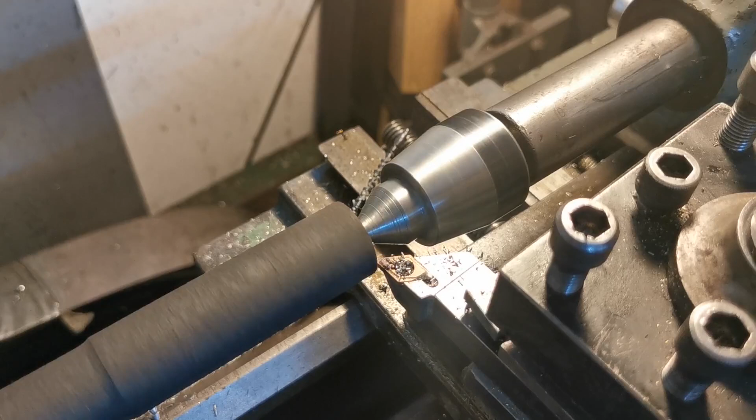What's going on, guys? So this was meant to be in the last video, but those engine mounts ended up taking a real long time to sort out.

So this time we are going to be looking at the absolute headache, the bane of my life that has been drive shafts, which means only one thing: CV boots, CV grease, which is just the worst stuff ever created. It gets everywhere and is sticky. This is my least favourite bit so far.

We're going to pull apart all of the CVs. I'm going to run through what I've tried to this point, because I've been battling this for a little while, and then we're going to look at how we're planning to solve this now and how we might solve it longer term if this doesn't work or fails at some point. So I think without further ado, it's all down here, so I'll get it laid out and we'll have a better look.

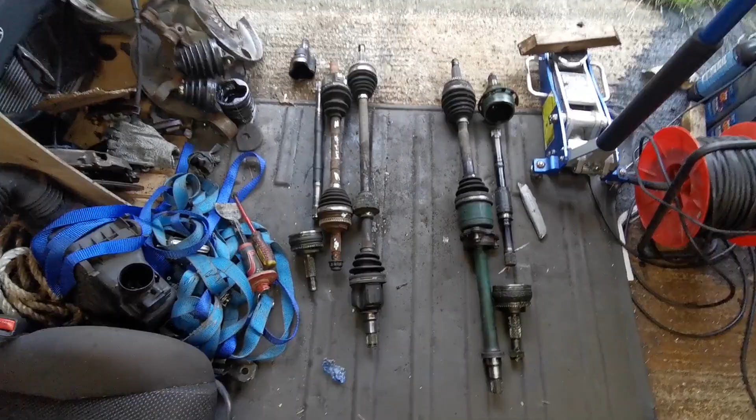This is the current collection. There's a few other bits that maybe we'll have a look at, but this is all we really need to know. On this side of the room we have Celica shafts. This one is for the right hand side and it's a two-piece shaft, and this one, which has been fully disassembled now, is for the left hand side, and it's just a single piece shaft. On this side of the room, in this corner, this fighter, we have the Yaris shafts.

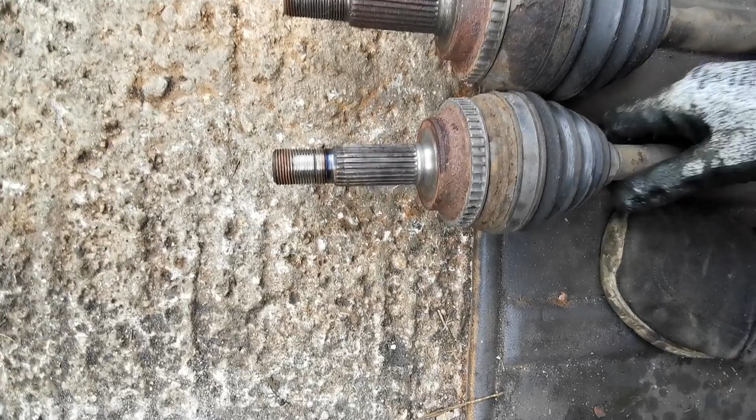A little rundown of what the actual issue is. The best way to look at this is like this. As you can now see, that end of the shaft is about lined up, about the same length. This end is a different length. This shaft is longer, not by a huge amount, but just enough to be, I think, well, I know it wouldn't work. So you'd have to lop off a bit. It's too long. That is issue numero uno.

Just as a side note, if we actually look at the other side though, the shafts are actually, this one's shorter. The next issue we have, and we'll look at it on this shaft because it's easy.

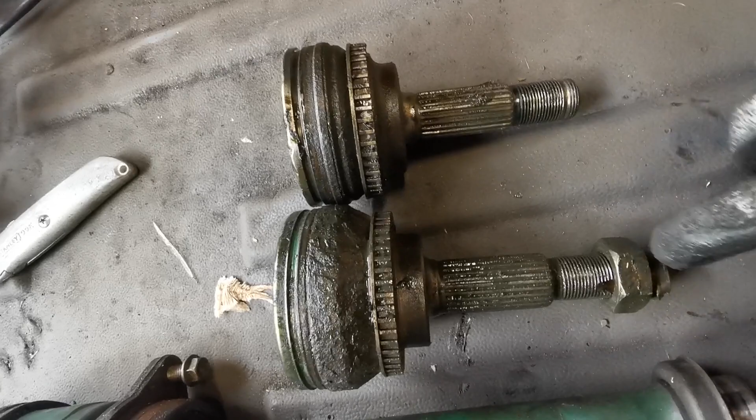That probably doesn't show up too well, but that spline and that spline are not the same. And at this end, that spline and that spline are not the same. That is further compounded by the fact that this is a Yaris CV and this is a Celica CV. And again, I don't think it shows up fantastically, but that spline is different to that spline, and vice versa. This is the inner CV. We have covered this previously, but that spline is not the same as that spline on the gearbox side of the Yaris.

So basically, none of the splines line up with each other. You can't swap any of the CVs between shafts, so it's not like you could run the Yaris shaft with the gearbox end of the Celica shaft. There is no combination of these that you can get to work together.

I scoured the internet for hours, actual hours and hours, trying to find a CV that would spline onto the Yaris drive shaft, to absolutely no avail. I then bought this, which is a later generation Yaris lower arm, because I was told that that fitted.

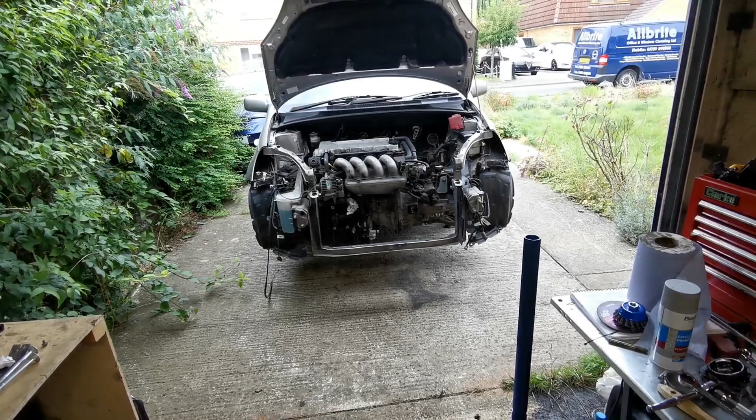And to go with that, buried under these gross CV boots in amongst all this other crap, is a Mark II Yaris hub. Now, the Yaris hub actually takes the Celica CV spline. It doesn't bolt into the suspension strut on the Yaris though, which is not the end of the world. You could modify that to fit, but who knows.

The bigger issue is that that lower arm did not fit that subframe. The idea with the lower arm was it made the track wider, as did the hub, and then you could just run both of the Celica shafts and all would be well.

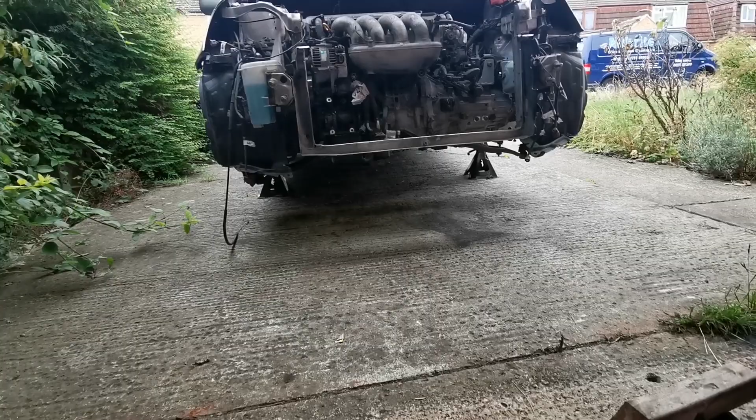I have been told that on the MR2 this shaft is slightly shorter, and as a result you can put an MR2 shaft on here which will mate with the Celica box. You can then run this Celica drive shaft, and if you get some Corolla hubs, I believe, allegedly, they bolt straight in and they retain the 4 stud pattern, whereas the Celica hubs are 5 stud, which is bad. We don't want that. However, that is not the solution that we are currently aiming for.

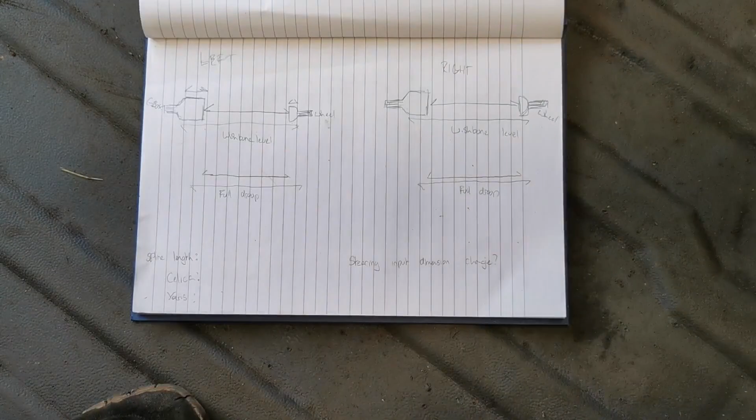What we are currently going to do, I shall get my little sketch pad out and we'll have a little sketcheroo. So bear with 2 seconds while I go and get that, because I'm disorganised, and we'll have a little draw, little sketch, and it'll be fun. Now, here we go, my best artistic skills.

So the plan is, at this end, we are going to have a Yaris hub.

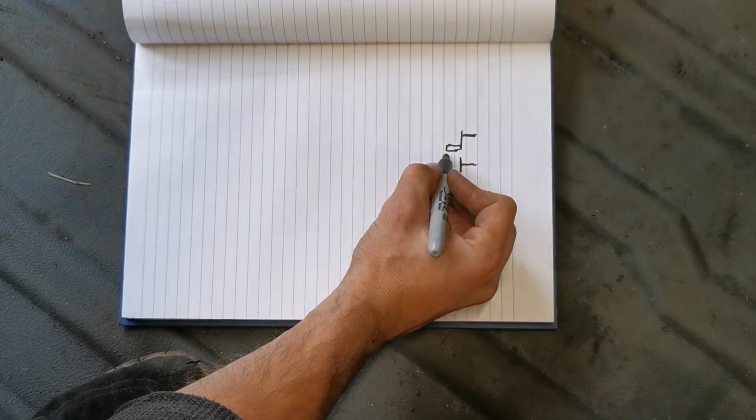This is a terrible drawing. Anyway, this is a Yaris.

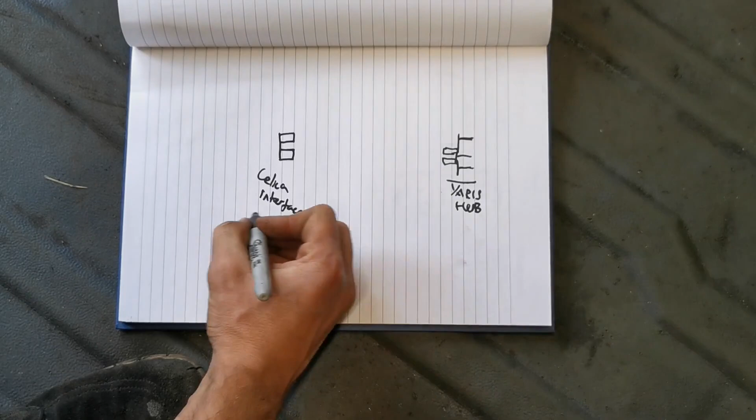Oh my gosh, Yaris hub. There, at this end, depending on which item we're looking at, we're going to have the Celica interface. So that will be either the gearbox or it will be the CV that's on that 2-piece drive shaft that we looked at a minute ago.

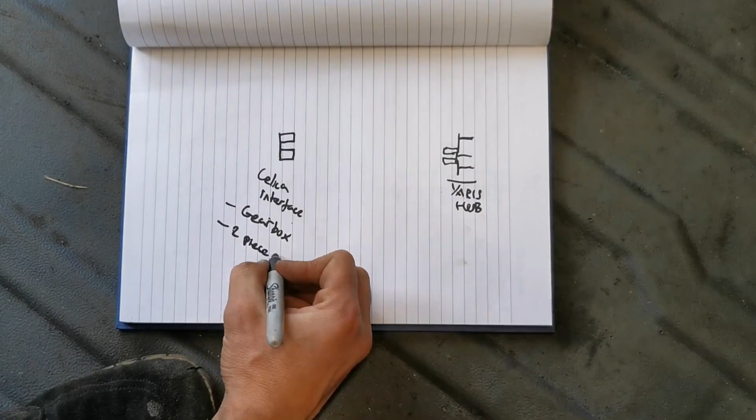I can't spell or write. Now, the issue we have at the moment is that we have a drive shaft which will fit this, and we have a drive shaft that will fit this, but we don't have a drive shaft that will fit both.

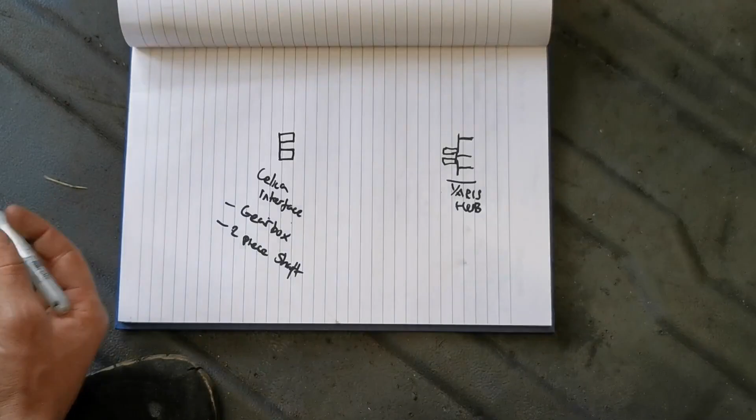So here we have a Celica inner CV, and here we have a Yaris outer CV.

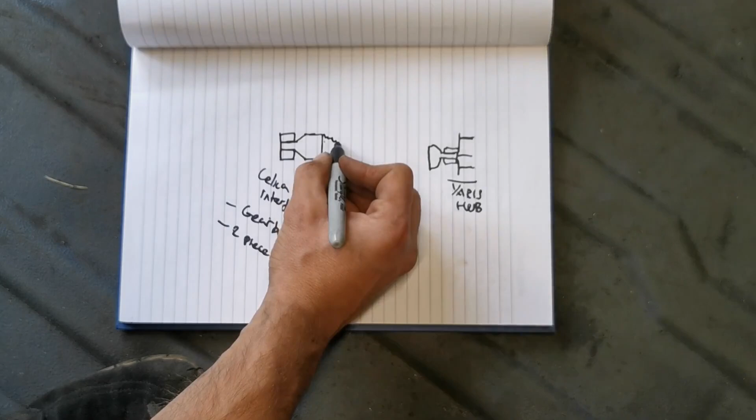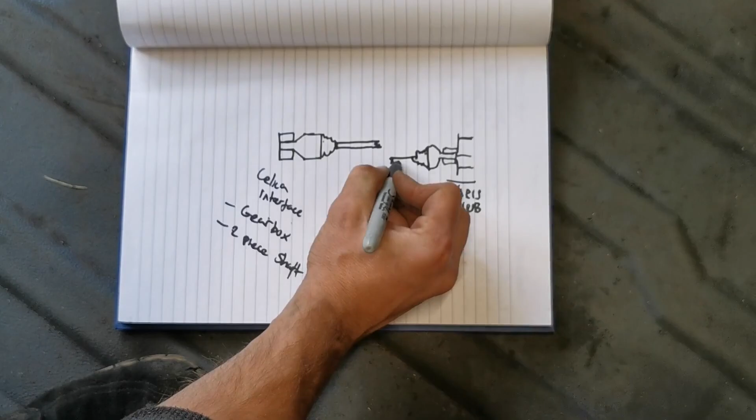What we're going to do is take the drive shaft of the Celica, like so, and cut it there. And guess what? We're going to take the drive shaft from here and cut that like that. So now we have two half drive shafts, which is no use to anyone.

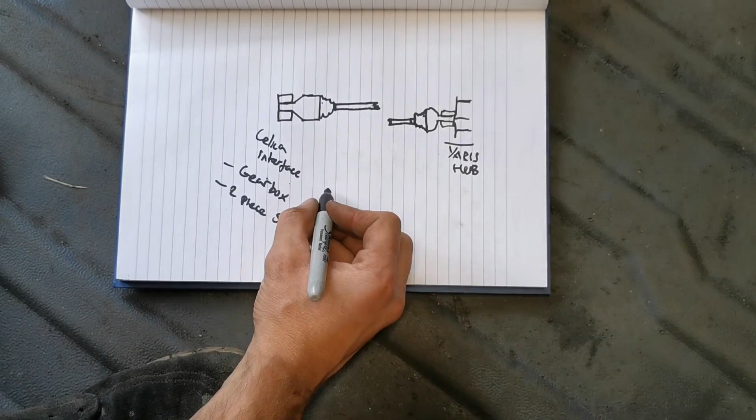But this is where it gets a bit sketchy, kind of. What I'm going to do is on the Celica side, initially—imagine this is zoomed in—I'm going to put it in a lathe and turn onto that shaft a taper of about 45 degrees.

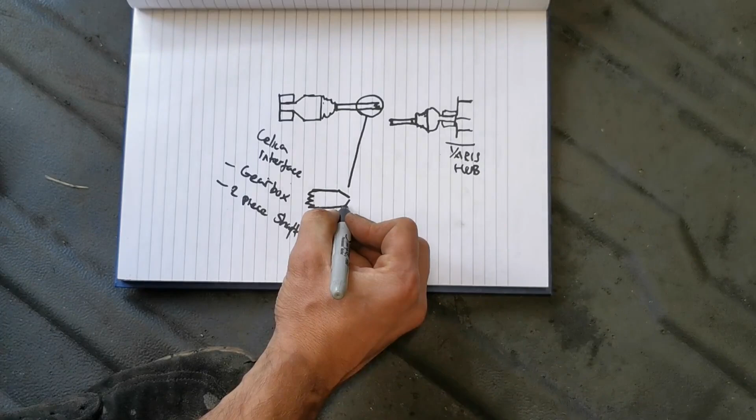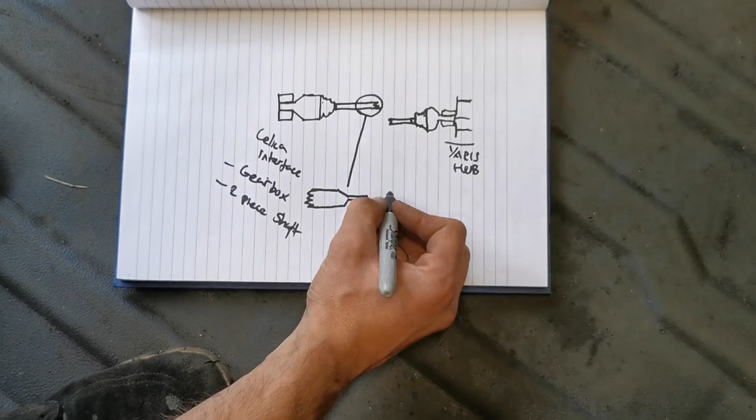At the end of that taper, I'm going to put a little dowel, so it's got a bit of a dowel pin to it. On the Yaris side, we're going to take that shaft—it's actually a slightly smaller diameter—and do that, then put the taper on, same as that one, but on this side we're going to drill into the shaft a hole which is pretty much exactly the size of that dowel, and slot that into there so it holds itself true.

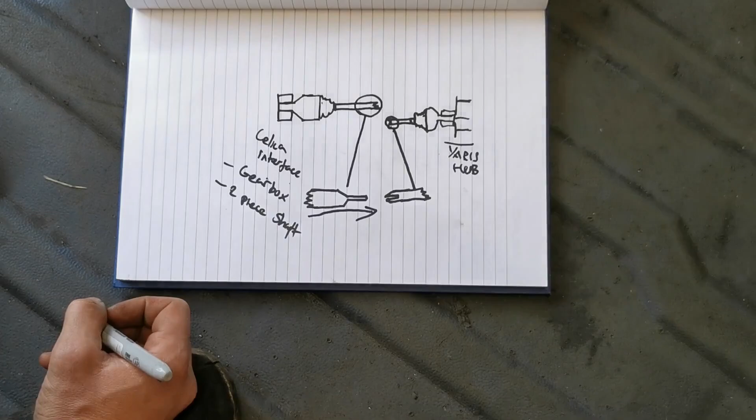I will hold both ends of the shaft in the lathe, hopefully, and then we will weld it together, building up the weld into this V groove as they go together, for a really nice, strong, hopefully, bond. Loads of heat, big TIG welder.

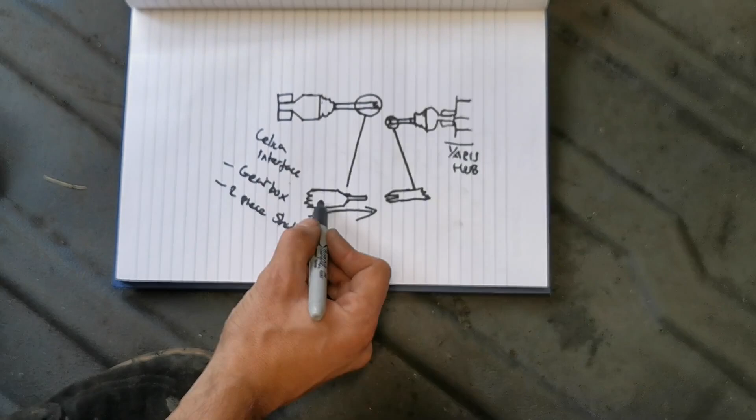Once that is done—like I said, this is slightly bigger than this—we will then run the lathe and it will just skim the top off the weld, and run the lathe just slightly over to that, taking off a bit of that material, so this and this to this point are uniform.

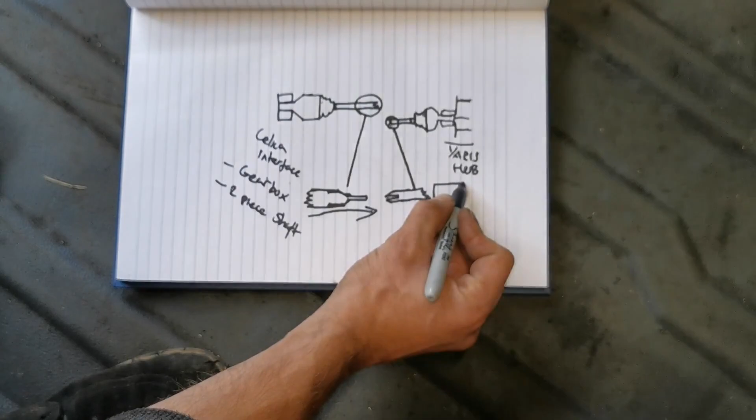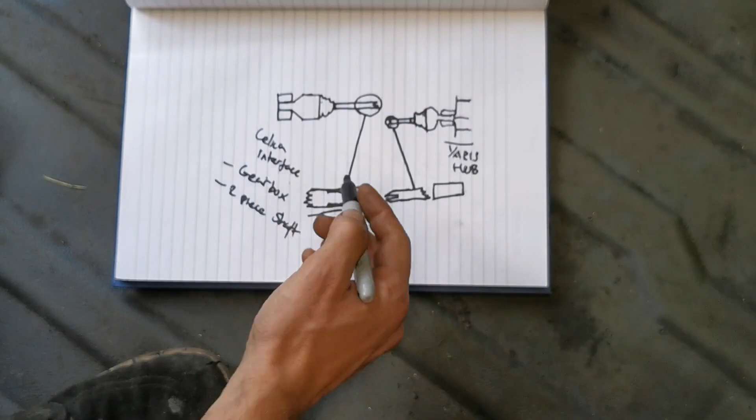Then I'm going to slide over the top of that a sleeve, basically a bit of tube, which will sit all the way over the joint and the weld. I'll run a bead of weld around each end of the sleeve, so if this joint fails—because drive shafts are designed to have some twist in them, and a welded joint isn't ideal for that—hopefully all that will happen is I'll lose drive, and this sleeve held in place should stop a flailing shaft wiping everything out around it, because that would be less than ideal.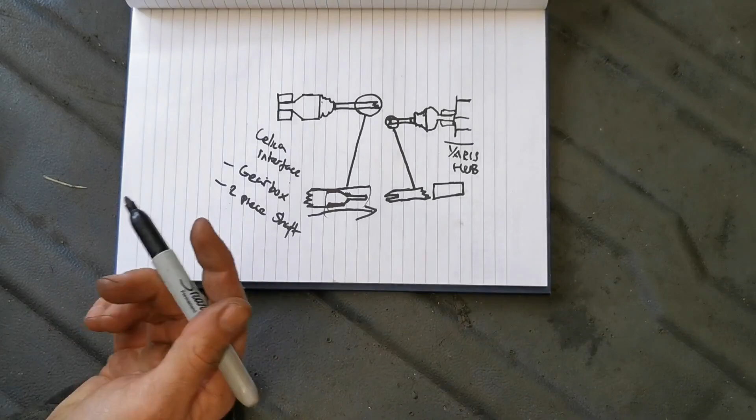So that is the plan. That allows us to set the length, retain the Yaris track width, retain all of the Yaris front end, run a Yaris CV in the Yaris hub, and mate to the Celica box.

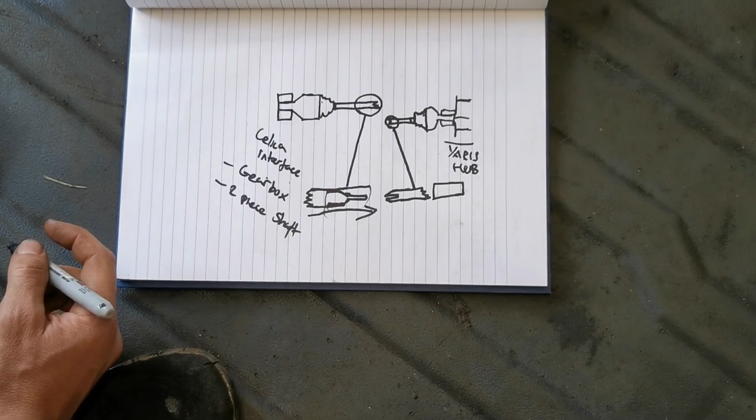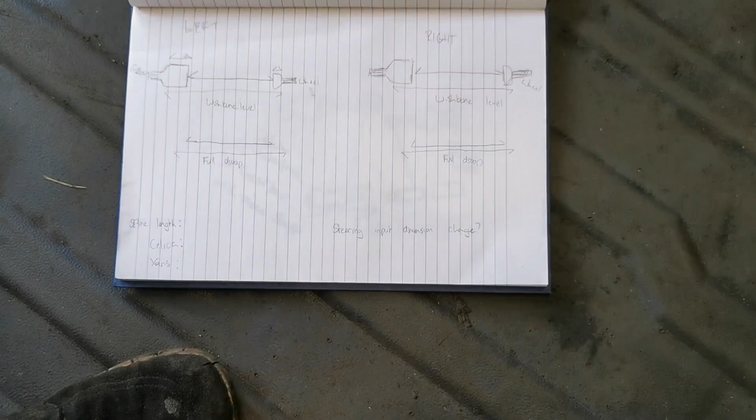So what I'm going to do—I've drawn out a little table here, we'll have a look at it over there in a sec. All I need to do is measure, basically work out the length at full droop on the suspension and when the wishbone is level, which gives me the longest and shortest eventuality of the drive shaft. We'll go through how we're going to work that out in a moment.

If that fails, then we'll have to get some Corolla hubs and some MR2 drive shafts and see if that works. But for now, this is the plan, and that is how we are going to progress this video. So let's get measuring, and then we'll go and get making.

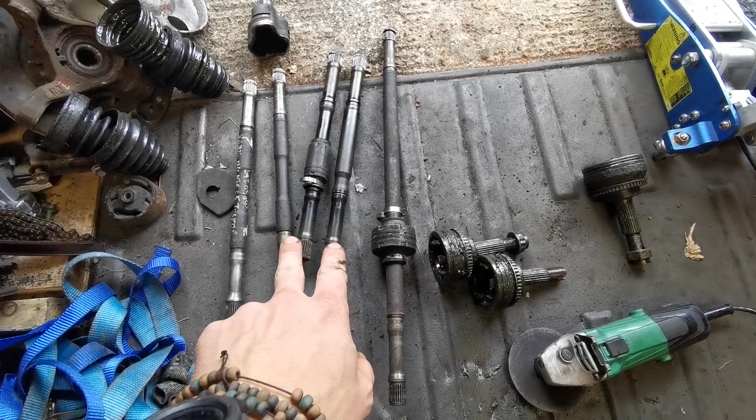And just like that, I have all the bare shafts I need. So the two Celica ones there, the big long Yaris one, and the two Yaris ones, but that's the non-mullered one because it's got all the breakers writing on it.

Now the Yaris CV outers are just a monumental pain in the backside, I find. The Celica ones were dreamy, and the Yaris ones were not, but I did find there's a really useful tool that you can use to get rid of them.

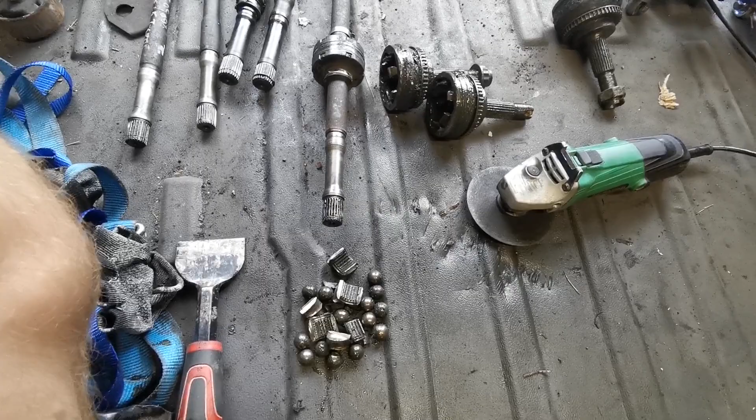So that gets rid of them pretty well. I'm not sure if that's how you're meant to do it. Pretty sure it doesn't say that in the Haynes manual, but online everyone just seems to suggest that you buy whole new drive shafts, but that doesn't work for what we want to do.

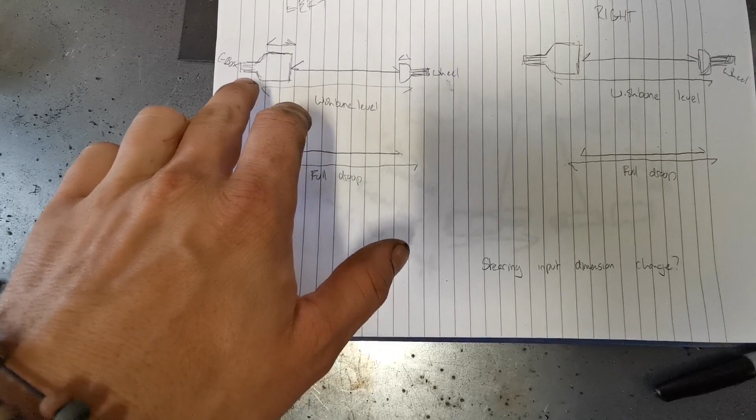If we go back and look at our pretty pictures, I think I mentioned this in the last bit. I've got my left, I've got my right, and it's measured. I'm going to measure the...

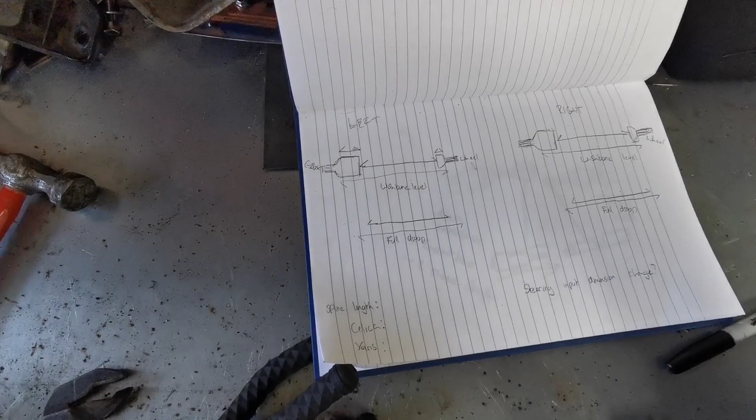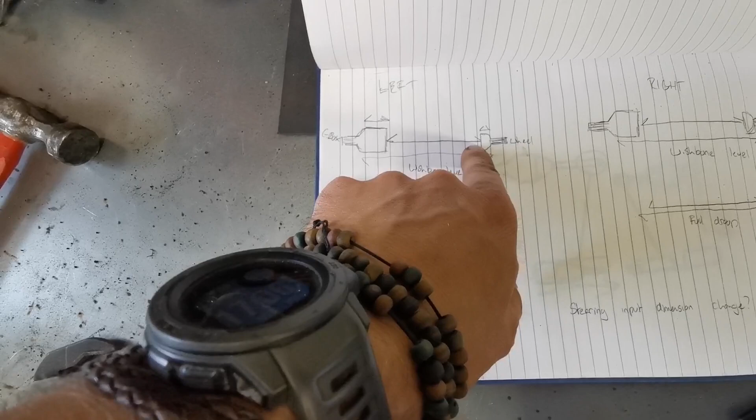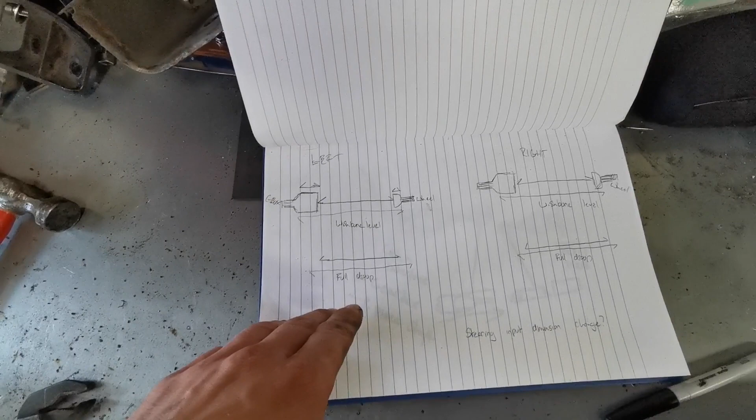Internal depth of both of the CVs, then with the wishbone level jacked, so that should be the shortest the drive shaft's ever going to be when the wishbone's level, and once it goes past level it gets longer, and once it droops past level it gets longer. So I'm going to get the length from there to there, and then from the back of the CV to the back of the CV, and I'm going to do the same thing on full droop for the left and right, and that tells me basically the shaft has to be quite a bit longer than that, but cannot be longer than that, otherwise it will bottom out or it will pop out.

I've also got spline lengths defined here, and yeah, from all of that we should be able to work it out.

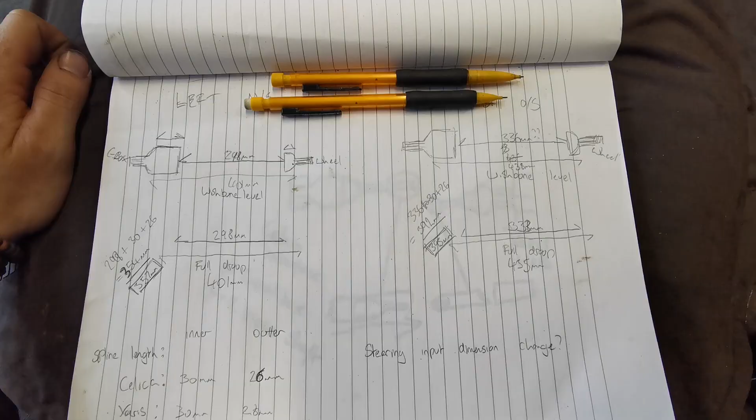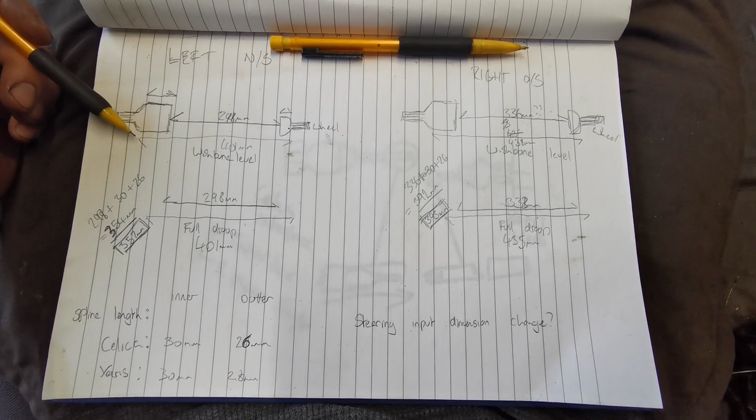Last talky bit before we start the doughy bit. Got the measurements. There's absolutely sod all really in it, like a couple of mil between this and the suspension travel, which is quite nice. I guess there's not masses of travel on it, to be honest.

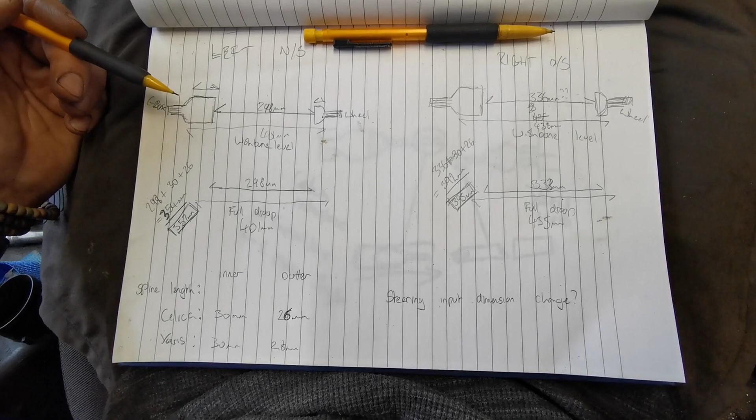There'll probably be even less potentially if I do some suspension mods and get it slammed, but slammed to a good level, not a ridiculously low level.

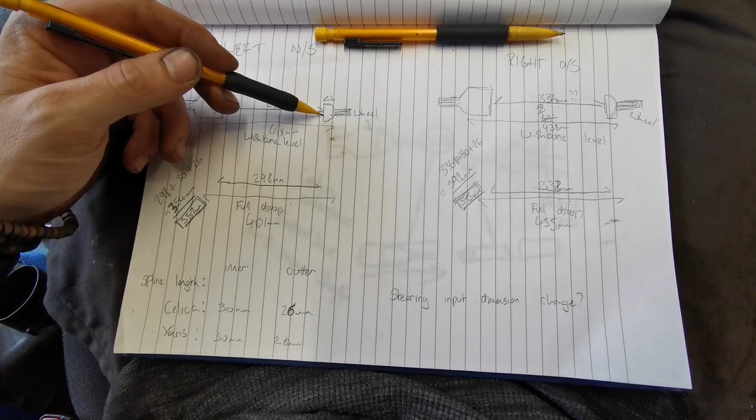But anyway, basically all I've done is taken this length and then I've added the splines on. Once you've got the splines on, this CV is stationary and the splines really do sit flush with the back. So you just add that spline on there, and then I just rounded it up slightly by a couple of mil.

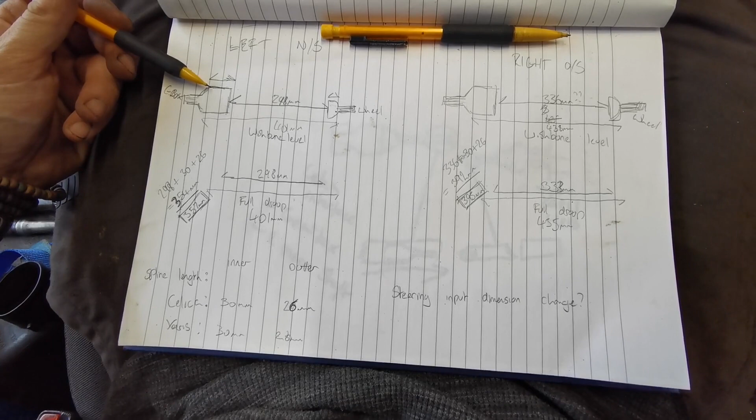I might take that to 360 to be honest, but there's no way it can come out, and it's going to be sat about halfway in there all the time, which is about where it wants to be.

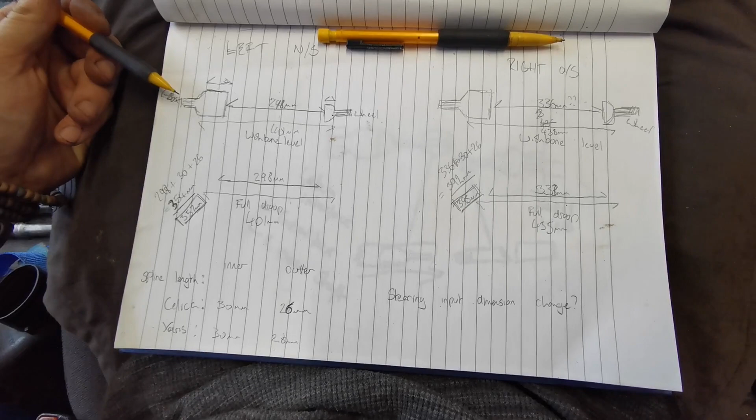So without further ado, we're going to go on a little journey and visit a man with a lathe who's very kindly offered to give me a hand, and have a look at actually making them as described. So let's go.

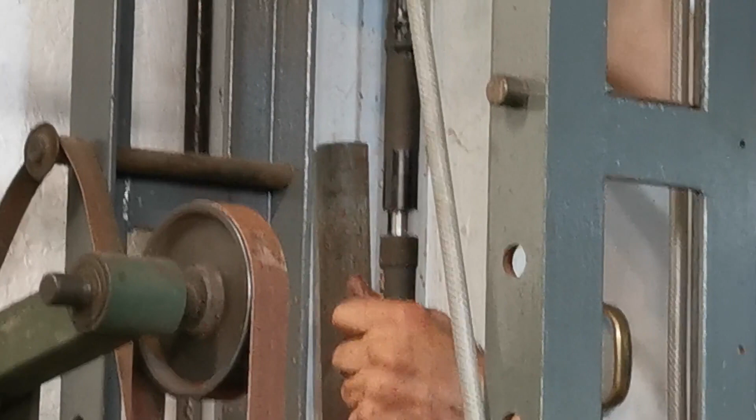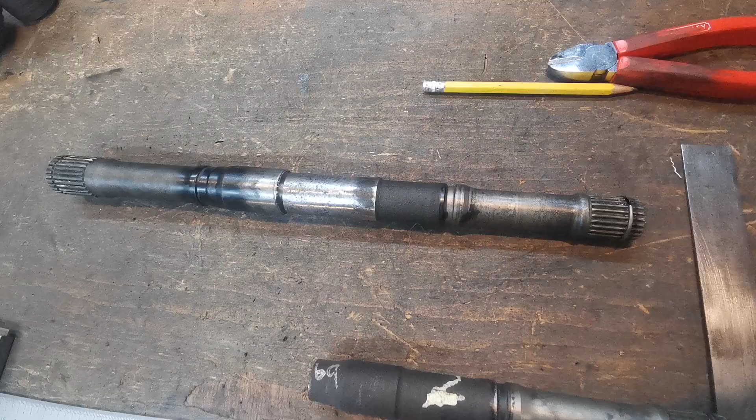First and foremost, huge thanks to Mark for helping me out with this, absolute lifesaver. Obviously I couldn't have done this without him, but looking at this you can see we've got the shaft shoved together now and it's connected, it's pinned and doweled, it's nice and true, we've checked that, all is looking good.

Now we just need to run some beads of weld in the joint there, all done. Everything will be good, hopefully it will stay true. Let's crack on.

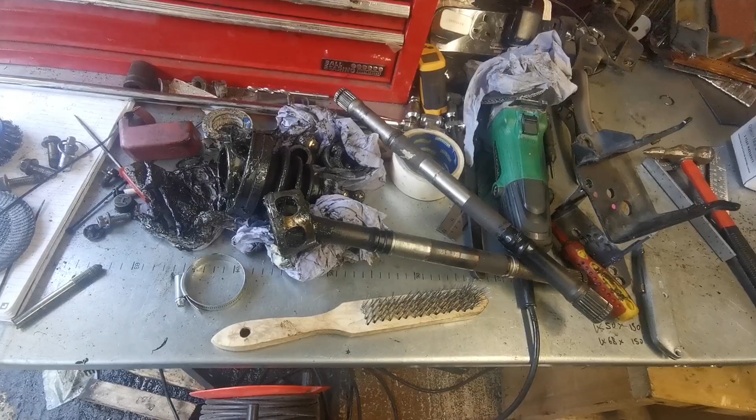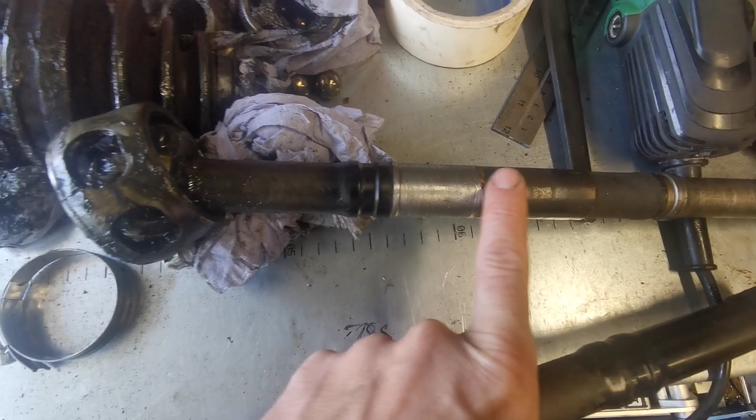So next step is going to be to take these shafts that we've got now, see, nicely welded together, and it actually worked out pretty perfectly with the Yaris and the Celica shafts, that by selecting the right ones, there's a slight step on that, see, where the thicknesses are, but the thicknesses are almost identical, which is nice, and they're welded up, got a good few beads of TIG in there.

And the next step is going to be, I've actually just got to get a sleeve turned, so I'll be sleeving over the joint, and I'll put a bird's mouth on the end of each of the sleeves, because that stops you getting that single plane of heat affected area, so it should make it a nice bit stronger. But I need to get them turned, so we shall have a little look in a later video at just welding them on.

The key thing now though is to check that they fit, because with this one in particular, me being the muppet that I am, I referred to the wrong number when I started cutting them apart, and it was actually, I think, 30 or 40 mil shorter than I'd calculated it needed to be.

Luckily you regained 10 mil, and fingers crossed it's going to be just long enough, as long as it doesn't pop out. Ideally the little circlip that sits inside the inner CV retains and doesn't pop past that at full lock and full droop, we're all good. I've got some shiny new CVs for the outers, and all we need to do is pop off the snap ring for the outer CVs, and then we can slide those on and off easily, and we don't have to repeat the issues we had before.

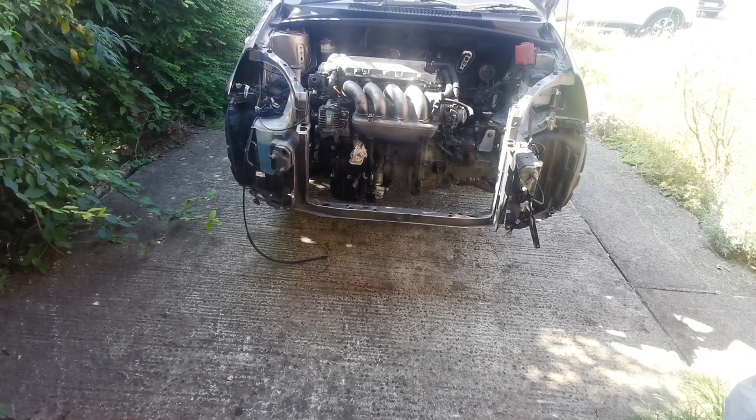So for mocking up, we'll take no circlips, no snap rings, and just put the shaft together, go drop them in the car, and then rotate the wheel round at full droop and make sure nothing pops out. So I'm going to get nice and greasy again putting these ends back together. It's actually a bit of a bugger. Get them slotted on, and then we'll take a look at them in the car. Be right back.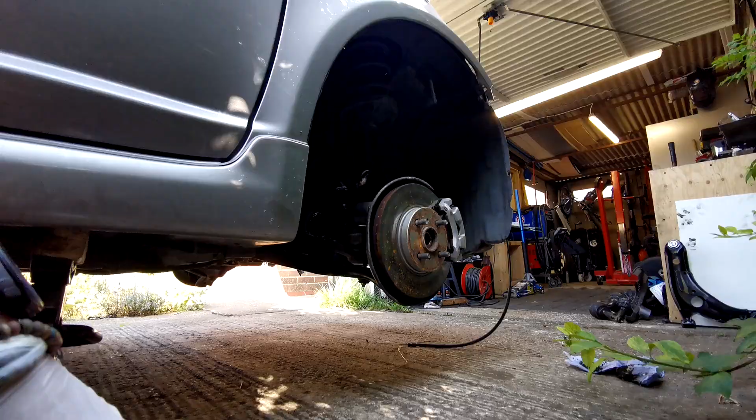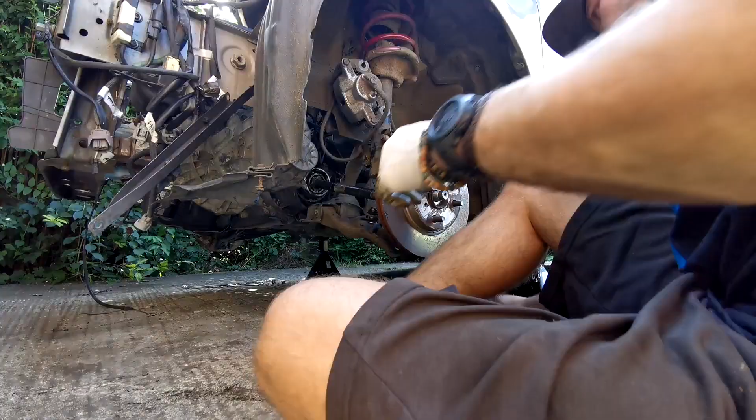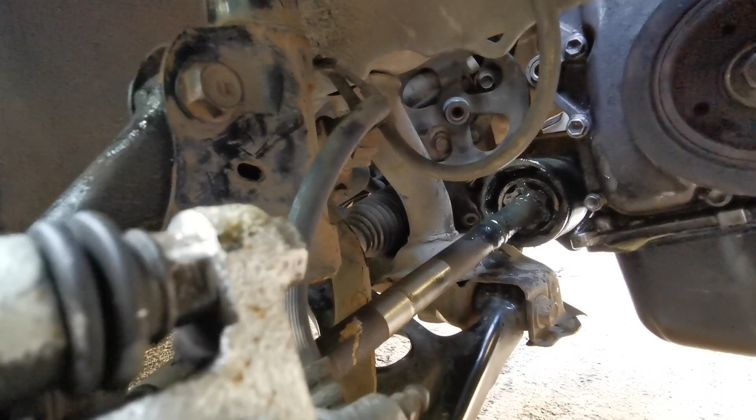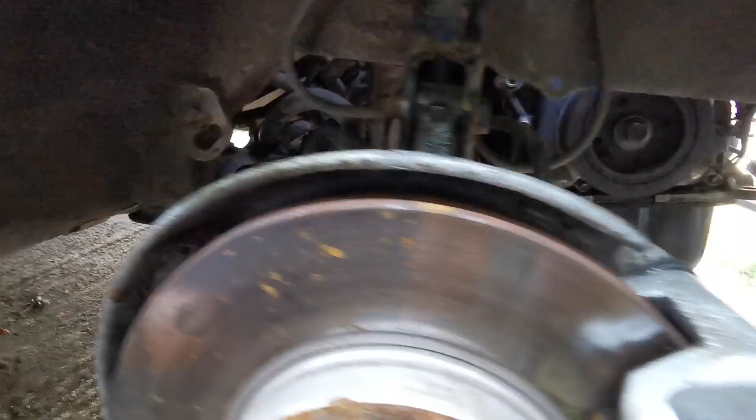Well, don't know how well this shows up, it's very dark under here. But that's one, and that one sits in there. So that's the one that we did right, and that sits in there, absolutely perfect. Get right in there, low light, see it sitting in, not too deep, not too shallow, and that's just nice. Goes well. Shafts are nice and straight as well, which is always good.

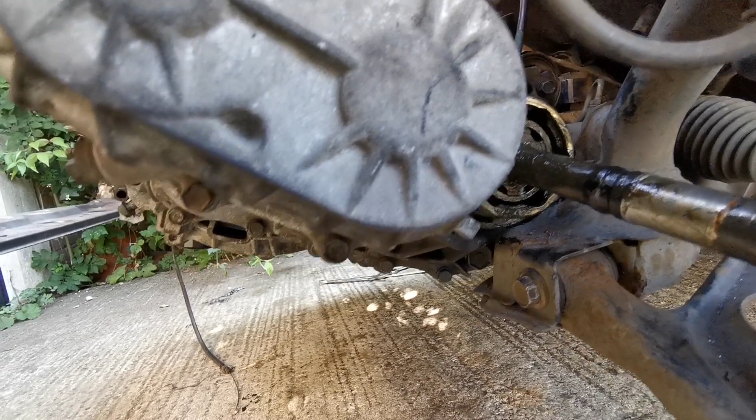This side, however, is the one that we got slightly wrong, and when the gearbox isn't in the way, you can just see - again, I don't actually think it's a problem, but it's close. That wasn't actually all the way in, so that's all the way home now, and it is close to the edge. I think probably the camera makes it look slightly worse than it is. It is in there, and you can kind of see where the snap ring goes. Obviously I'm not on full lock at the moment, so we shall go and wind that on now quick.

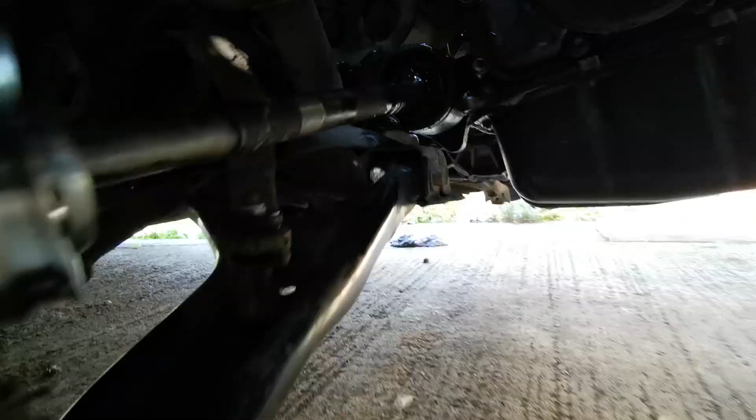Still in there, still enough room for the retaining ring, I think, so happy days. And we'll double check the other side, but obviously given that that was already looking better, that was the sort of ideal scenario, but there's not a huge amount in it, probably like 10 mil in the overall length of the shaft. Just to be sure, fine again. And this is when this side's probably all popped out. I didn't hear ball bearings flying everywhere, so there you go. Again, close, but all good.

So assuming that that does actually all work, we're pretty golden now. So yeah, drive shafts - like I say, we're going to sleeve them and boot them etc. at a later date, once everything else is done.

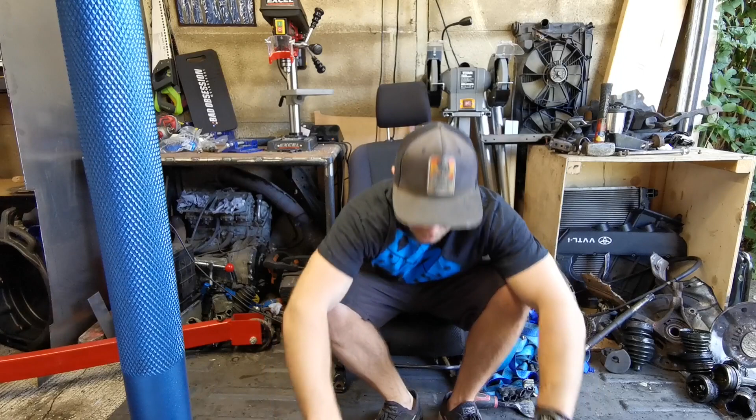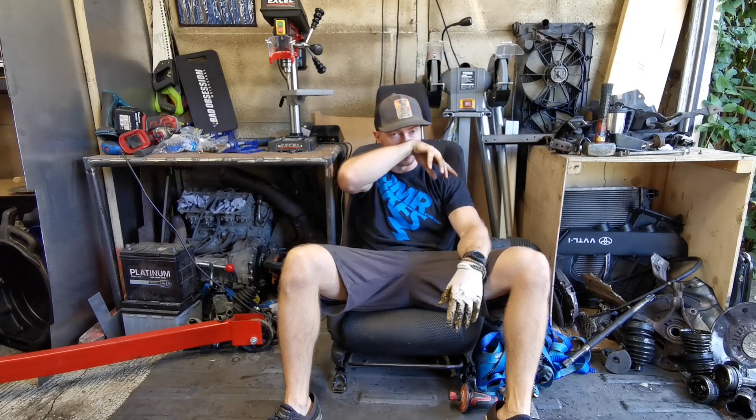As you can tell, we need a lathe. Like I say, there's potentially you can use an MR2 drive shaft and Corolla hubs - it just gives you the slightly shorter track width. If these do fail, which I don't think they should, I'm sure someone in the comments will tell me otherwise, but I don't think they should, then that would be the route I'd have to investigate. But yeah, we'll sleeve them and get everything finalised at a later date.